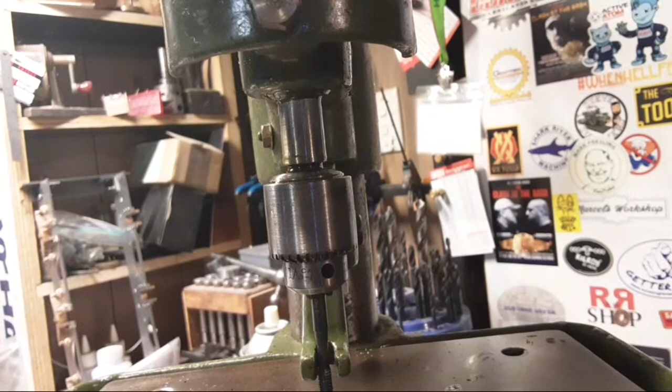Adventures with a very small lathe.

You've got 3 weeks, you're not late for another 3 weeks, you know what I'm talking about. But good to see you, Alistair.

I'm going to move this back on the bench a bit because while putting it up here was a really good idea, it's pretty heavy.

Don't know much about it. If anyone does know anything about it, get in touch.

At this point it's green, and it's not a bad job - it's been painted nice and it's not in bad condition, so it's probably going to stay green.

Instagram Bob had loads of info, yes, he knew a little bit about it. I don't reckon this is the original colour, and it's certainly been repainted at some point.

I was going to take this cover off so we can actually see how it works.

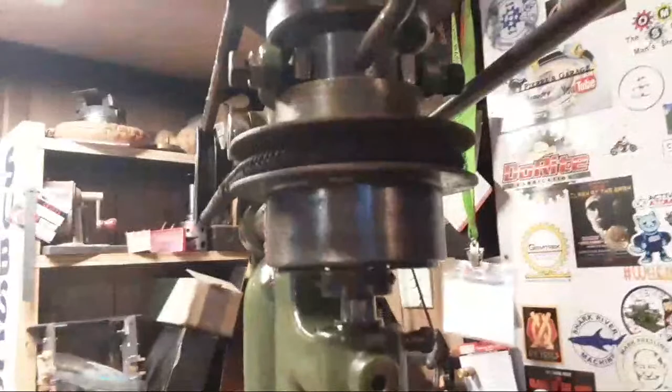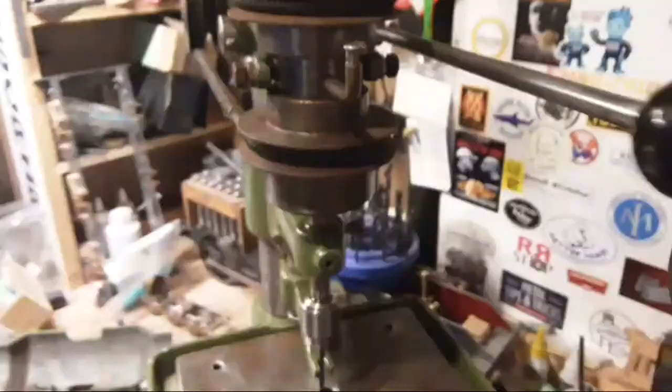Way too close here, probably. Yeah, that's not going to work. Seriously?

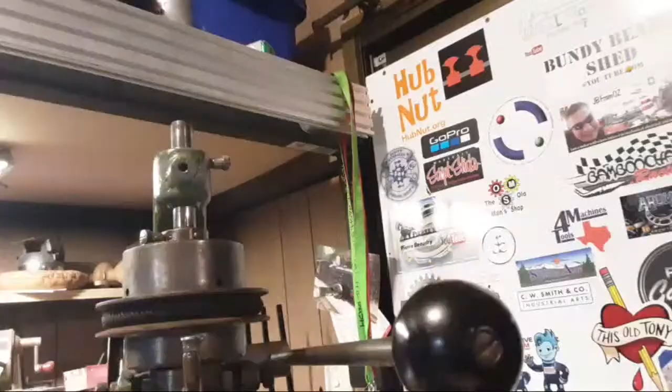Anyway, I'm just going to walk you around this for a minute. This has got a belt that runs around both pulleys from here on a shaft, and it's got a drive pulley here.

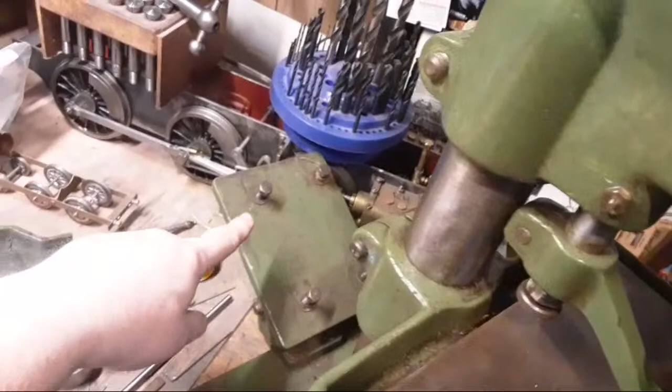It's got a motor bracket here, and I've got a motor that came off my milling machine that I'm probably going to put straight on this.

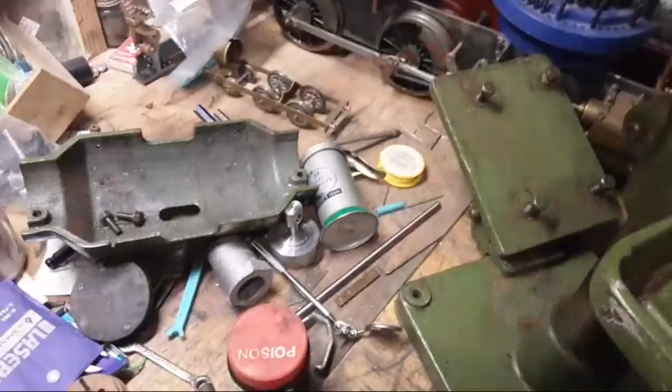I don't think there's a lot wrong with that motor. It should bolt on nearly - a Crompton Parkinson motor should bolt on there nearly straight away, and it needs a pulley to drive this belt, the second pulley in here.

So it sort of is a vertical hole maker, I guess. If we're going to be pedantic about it, that's what it is.

It's got a round belt on here, which runs around here, and one of these pulleys runs backwards and one of the pulleys runs forwards. And it's got a counterweight on the back and a lever here.

And 2 cone clutches. So what happens is that this cone clutch, when there's force pushing down on the tap, or pushing up on the tap to tap in, it runs forwards. And then when you release this, it stops. And when there's force pulling up on the tap, it runs backwards. So that's how it works.

I guess you could reverse it if you wanted to. It sounds like a good way to break taps. Never put a reamer in it, no.

Hey Tinker, good to see you. So,

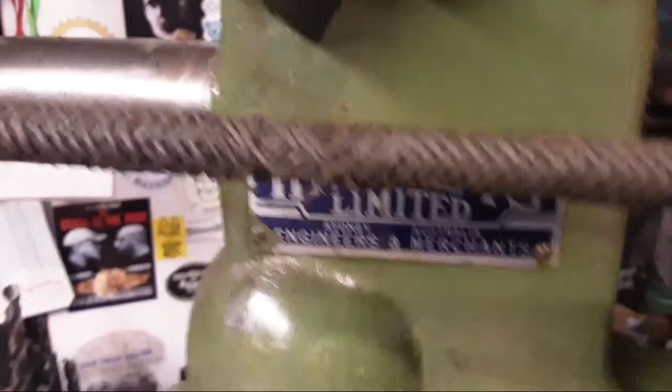Don't know where you get this woven belt - there's a join there, I think. But don't know where you get this woven round belt. If anyone knows, it's about probably 3/8, something like that, 7/16 diameter. It might have been 1/2 inch once.

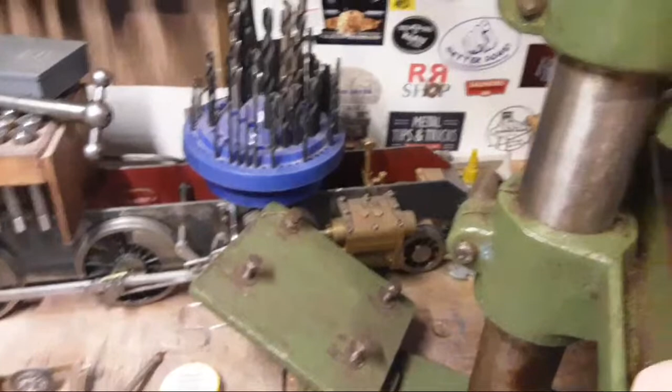So it needs a motor and a pulley and a belt, and probably taken apart and a good clean, because I don't know how good these clutches are inside and what's inside them, and they probably wouldn't hurt to get cleaned out before I start breaking taps with it.

But there we go. Didn't come with a free tap, no.

It's a pretty big O-ring. It is adjustable for tension here, so you can move this backwards and forwards to tighten the belt up.

So, not sure about that, we'll try and chase that up though. Anyway.

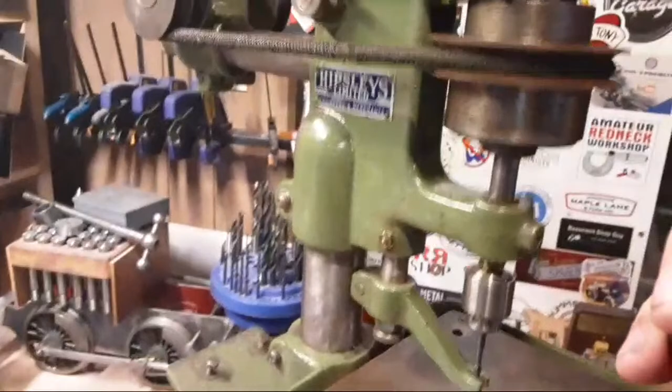G'day, Glenn. I mean, I'm down for plastic belts, but I reckon I'm not going to trust that one too much, to be honest. It might do another stretch, but...

I'm sick of holding this camera. So we're going to put this up somehow, probably. There we go.

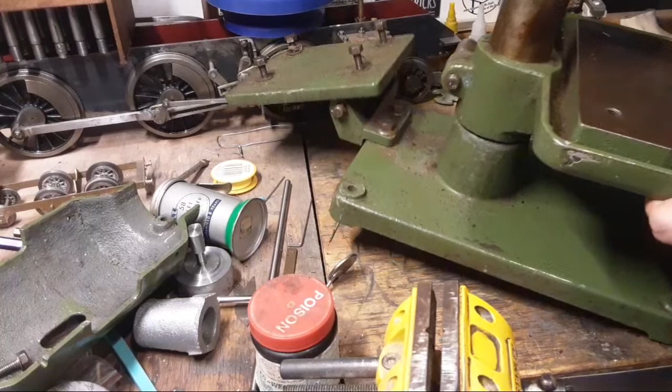It does have the original motor mount on there, so it's a matter of putting a motor on it so that it lines up with the pulleys, I guess, at some point.

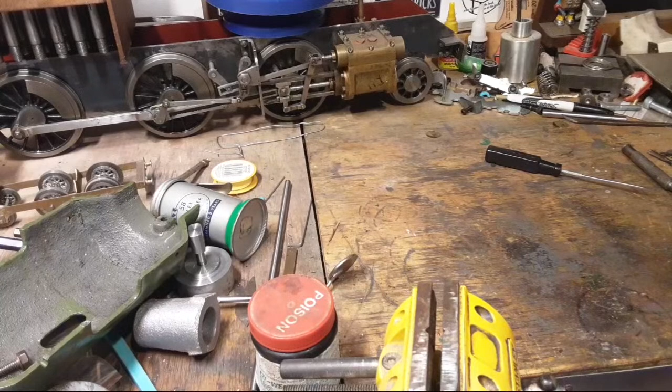See, bench is nice and clean again. It's not really, but anyway.

So this week's work on this is a conrod. Look at that. How cool is this?

A little bit impressed with this, actually. More than impressed. This is kind of pretty epic.

That works. It's still not as perfect as I would like. I'm going to mess with it and probably it's going to run in, but there's no slop in that and there won't be any knock in it, I don't think. I'm really happy with that.

It doesn't move backwards and forwards too much coming in and out, so these must be somewhere near straight to each other, which I'm really pleased about, and also this way, which I was worrying about.

And it still needs an oil hole in here and oil holes in the front, in the gudgeon there, etc, etc. And it probably needs a spacer in here. I'm still working out what I'm going to do there.

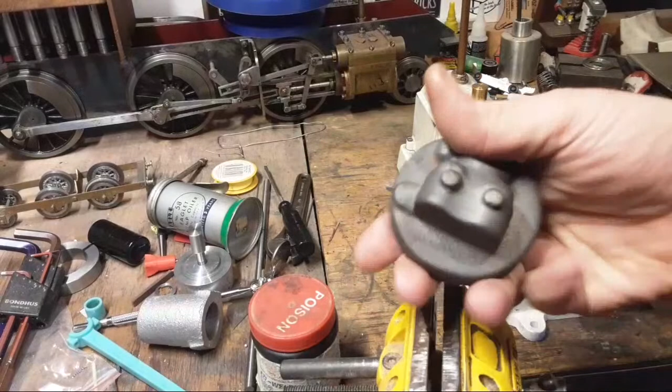This is the cylinder head. Firstly, we've got to get two holes right through here with enough space in them for ports that line up with these two holes here and parallel to the back face.

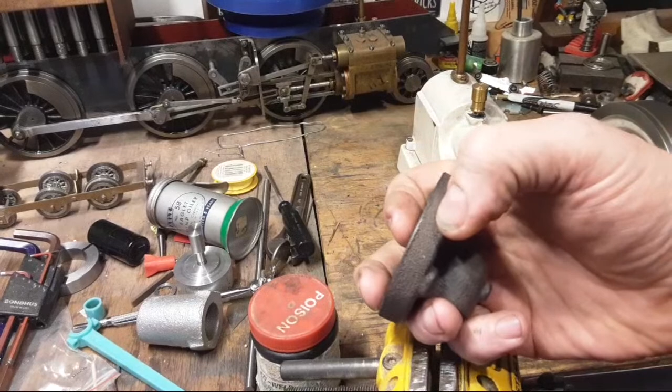We've got to machine this down probably about 4mm, something like that, and we've got to put 3 bolts in it, one here, one here and one here, to bolt onto the cylinder head.

And we've got to put a spark plug hole in the top here, and then there's a slot in the back that meets up with that to allow the spark come into the combustion chamber. And then there's got to be 2 holes in here that come through and intersect with these 2 holes that come through this way.

And they're, what, 9/16, half inch, something like that. Bit scary, that. And then this one's got to be drilled and tapped.

For the fork for the rocker arm, so there's a bit of work in that, and it's not fun work. The cast iron's still an unknown quantity, but if it's as good as the piston was this time, we shouldn't have any issues with it.

This has got a bigger spark plug in it. It's a 10mm metric NGK, it's over there somewhere in the box. It should look pretty good on there though, I think. It's a fairly big plug, but it's going to look good on there.

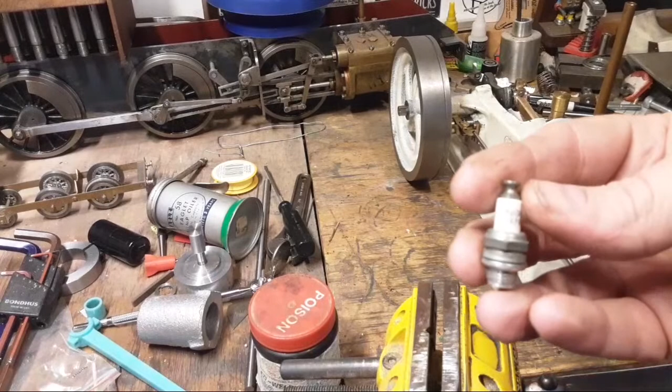This is a spark plug. It's a 10mm NGK. See if I can focus on that. I haven't got hope, I don't think, but we can try. It's a CM6. Yeah, I'm not winning there.

This screws in the top here on this angle, right? So it goes in, have a look. To there like that, something like that. In the center there.

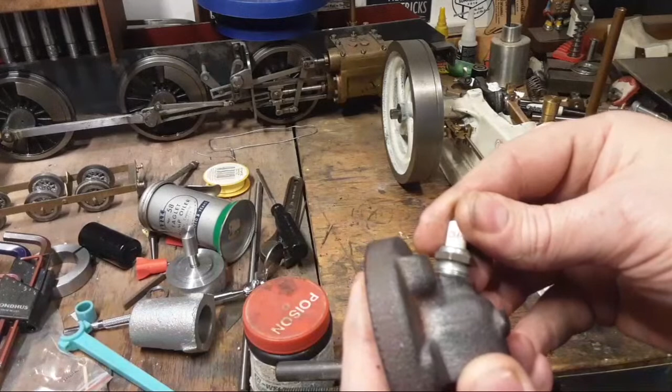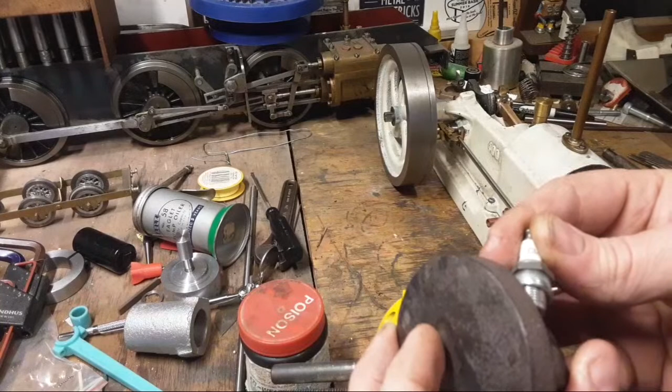There's going to be a slot here about 14mm by 3mm, something like that, if we can possibly manage it, which goes all the way through to the spark plug. So it's probably not super critical, but it's probably going to have to see if it works. It won't be, certainly won't be back here in the combustion chamber. It'll be out here. So that's how we're going with that.

So that's probably not even a big deal. I'm going to drill this and tap it, I've got a tap for it. It's 10mm by 1, I think, 1.25, maybe 10 by 1.25. Sound right? Not sure. It's a spark plug thread anyway.

Not going to be anywhere near that complicated, Ted. And all it's got is a... let's have a look at the drawings.

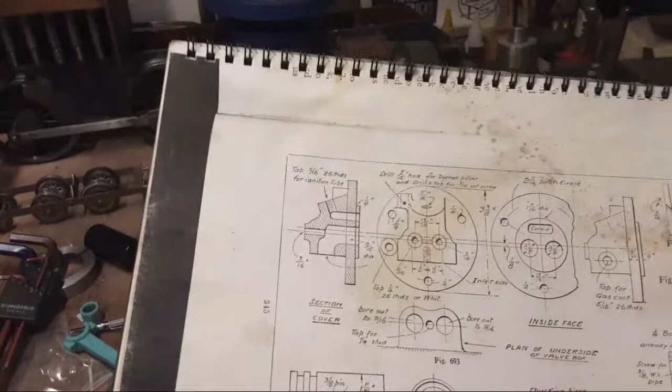This is a drawing, which isn't much use, but it's sort of okay. So we've got a thread here, and then we've got a slot in here, which, looking at the back of it, it's like this. This was actually cored in.

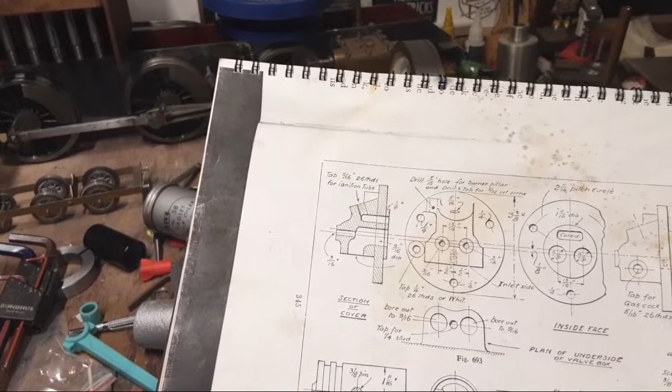90 out of 100 is okay. There's only about that crossing the road in some cities. If you happen to live in Bangladesh, it's only about half that chance of crossing the road.

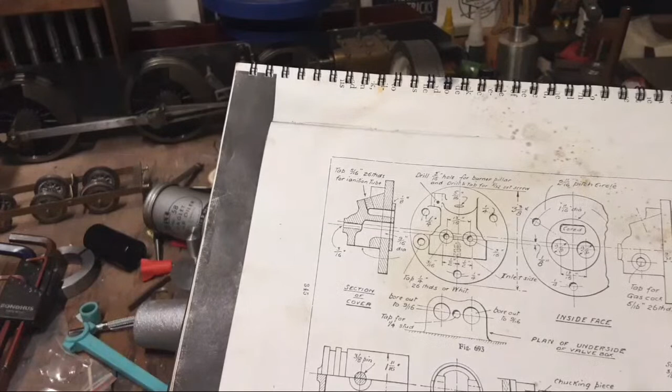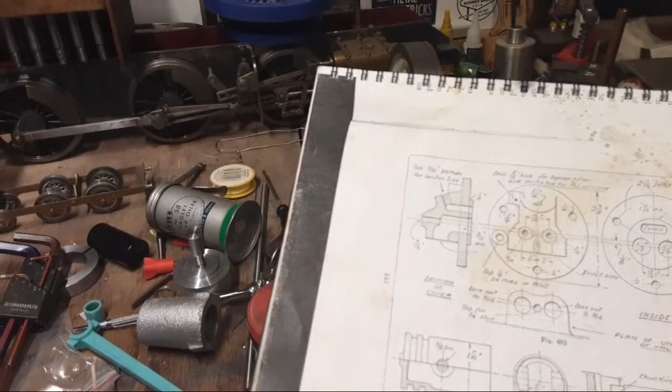So that's the slot there. And it's got a hole, this is 5/16 hole here for the hot tube, but we're going to tap it out to 10mm. And then it's got two holes in the back here, just off center, just below center, for the valves.

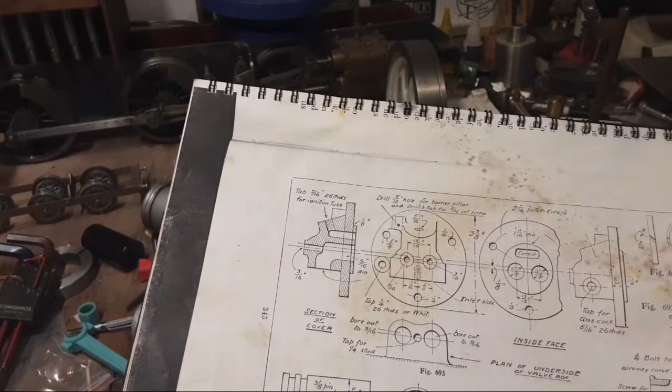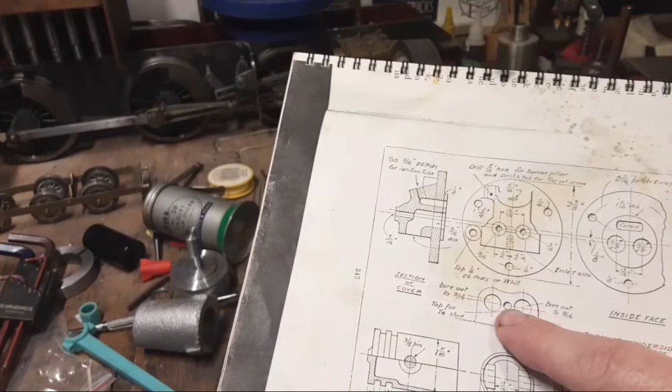Which should come through the front of the casting there, in the center of those bits, I hope. That's the theory. And then it's got three holes here for bolting down. It's got a hole in the center. If we look at the bottom of this manifold, it's got a hole here and exhaust and an inlet manifold underneath, like so.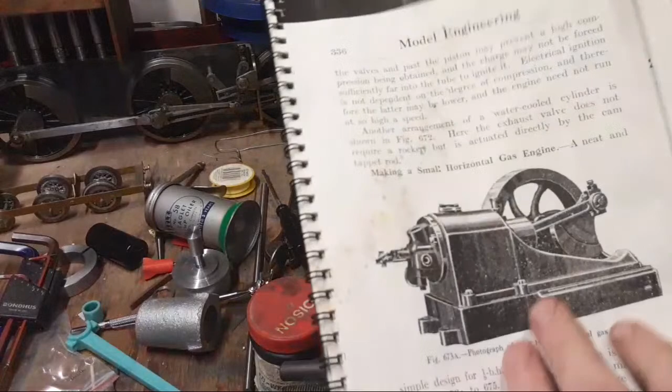Yes, there's 2 pages, Joseph, or 3 or 4 pages in the back of this book. If anyone builds an engine, don't start with a design in an old textbook from the 1920s, because that's silly. Just so you know.

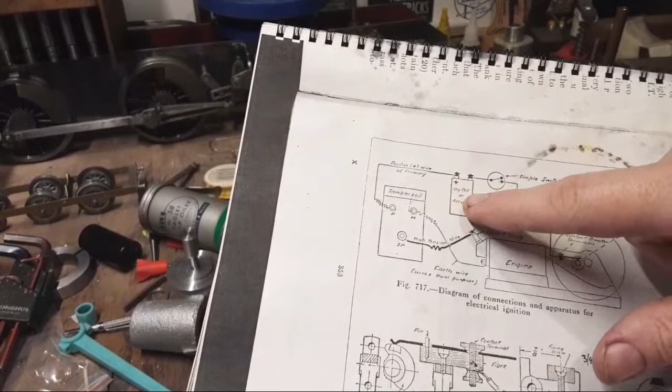It's got the information on running it on spark. So a spark plug and a trembler coil, and how to wire it up, and a dry cell or accumulator, and an earth wire, and it's got all the bits that we've made for the spark on the side here. We've got the spark cam here, and the trembler, and it's all insulated up with a thumb knurled screw, and everything's timing adjusted, all that sort of stuff. That's all on there.

So the cam looks something like this, and then there's a contact, and that's all put in, and that's how the spark plug goes to get in there like that. Which it says a miniature 14mm spark plug. Well, this is a bit smaller than that.

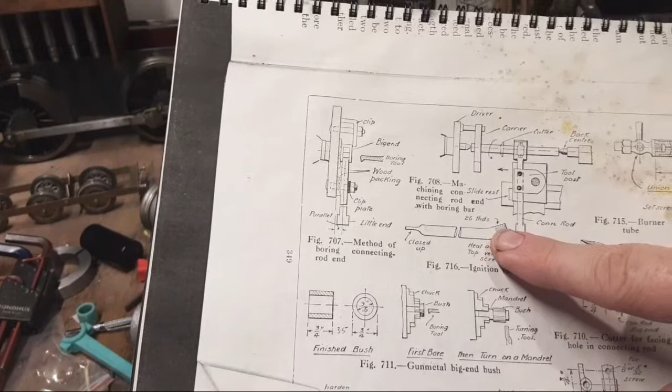So that's sort of one ignition system. The other one's this drawing here, right way up. And there's a burner and a hot tube, which looks like this, which screws in with a lock nut, and it's got a closed tip. These are a bit dangerous, really. And a little chimney that sits on there, and that's what this boss here is for, is the support for the chimney, and that's height adjustable, and the burner goes in the side with a gas burner.

That's all fun, but it's not particularly practical, and it's not particularly good for inside, and it's not particularly good for outside. So it's a difficult thing. So spark seems to be better.

But that'll probably work. If I can get compression, I've got all the rest. If I can get compression, which means valves and rings, if I can do that, then the thing will probably run, I think.

But yeah, hot tube's pretty temperamental and not particularly safe. They tend to blow the top out of the tube, and also fairly difficult to time, and probably not particularly safe, and you can't see where the spark actually is. So there you go.

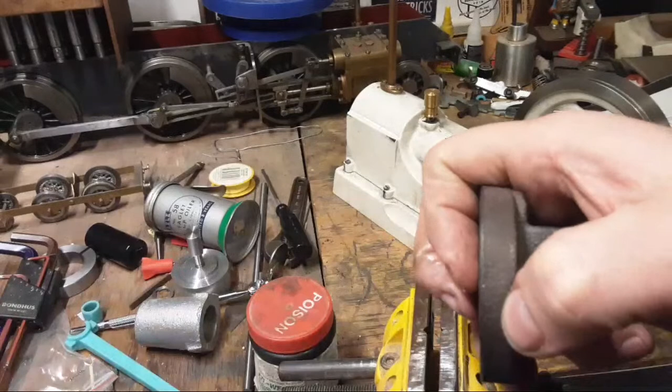Joseph's right, I think the deeper the head sits, the better will be the guiding. We've got plenty of meat here, so we can take this down to probably 4 or 5 millimeters thick. So if we have to, we can drop the head back in, what, 5, 6 millimeters.

This has still got to have an oil hole in here, and it was drawn with a little screw-in oil cap on here. I'm really not thinking that's going to happen, because I have a life, and it looks like something that'll go missing pretty quick and be fairly fiddly to screw in there, to be honest. So what I'm probably going to do is just leave that open and put an oil hole in here that we can top up. I don't think the inertia and centrifugal force will push the oil out the wrong way, but I'm not sure about that. I guess we'll find out.

Kevin, are the rings going to be cast iron? Really good question - one with no real answer, to be honest.

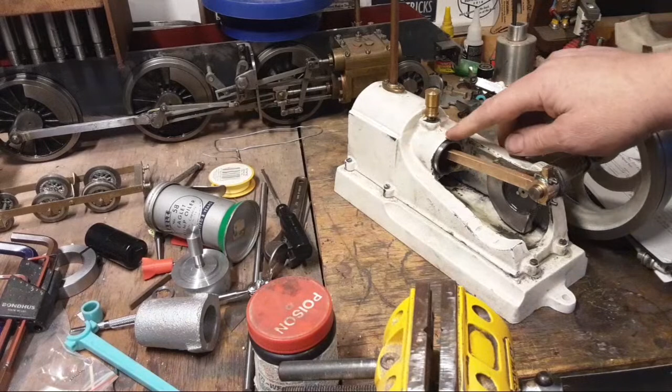It has got a hole, or it will have a hole, I believe, halfway along the piston on top of the gudgeon pin, and a hole in the gudgeon pin bush, so that this oiler here - wipe oiler - collects a little bit of oil and you get a secondary drip inside to oil the gudgeon. So that's something I've still got to do.

At this point, the thing's going to run 5 minutes probably every now and again. I don't think it's going to sit down and do any serious work, but we'll see. We can fix big end oiling and get all this pretty good. This one here - look, I don't want to have to get the screwdriver out and screw his tiny little stud out of there and oil it and screw it back in every time. It's just a pain, and it sort of halves your oil reservoir space if you put a plug in it, so we'll see.

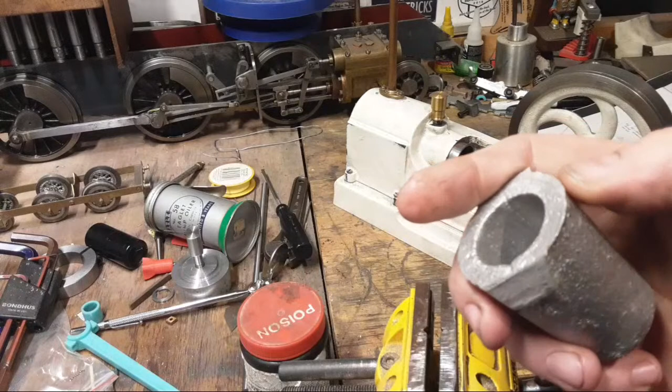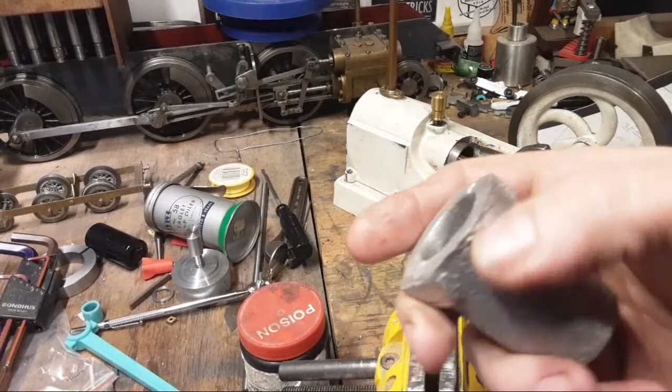Finding someone who can cast these to your patterns and end up with castings that are going to be machinable. Because my patterns on all sorts of levels could have been much, much better. If I'd put a ring around the top of the piston on the casting pattern on both sides, that would have solved a lot of problems with this casting, because there's not enough body in here and you get chill on this side and this side in this casting. This is all right because there's plenty of metal here, but we get chill here, which is the last place that the iron runs to, and here. So if we'd left a ring around the outside on each side and cast, and the same on the core to match up, cast that into it and machined it off later, we wouldn't have had the problems with the hardness in the piston.

If we'd put more radius around here, we probably wouldn't have had the same problems with hardness that we've got, and a bit more radius on here. So they're things you learn. There was chill in here because there was probably sand washout from turbulence where the metal changed, brushed in and then changed direction through here. So there's more to pattern making than meets the eye, and more to casting from patterns than meets the eye. I mean, we all know that.